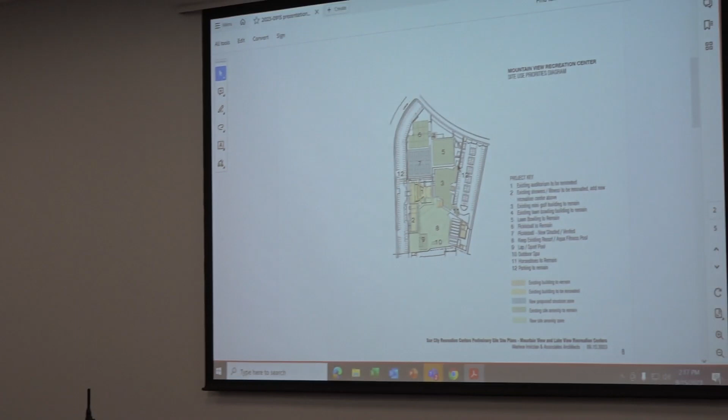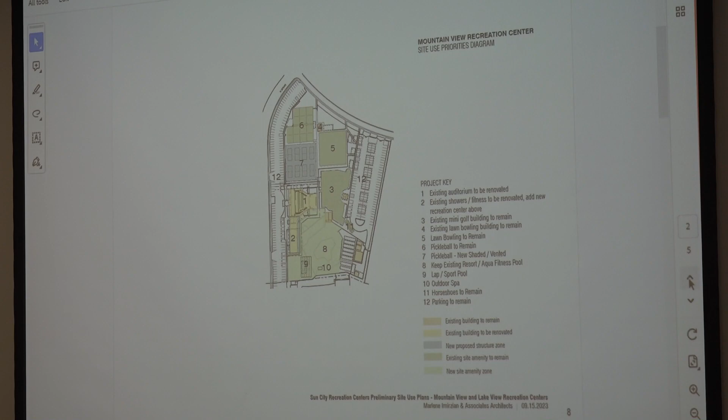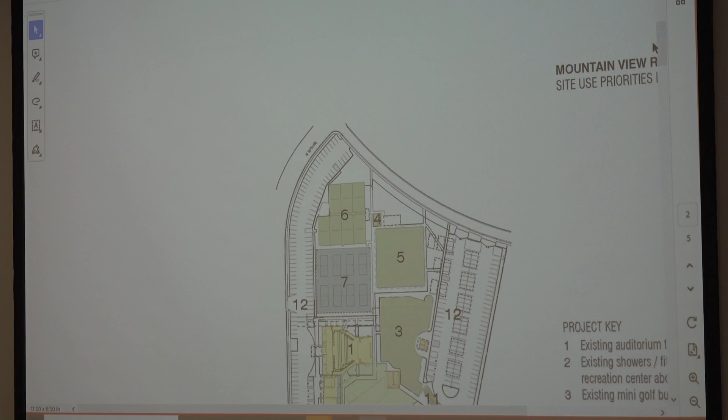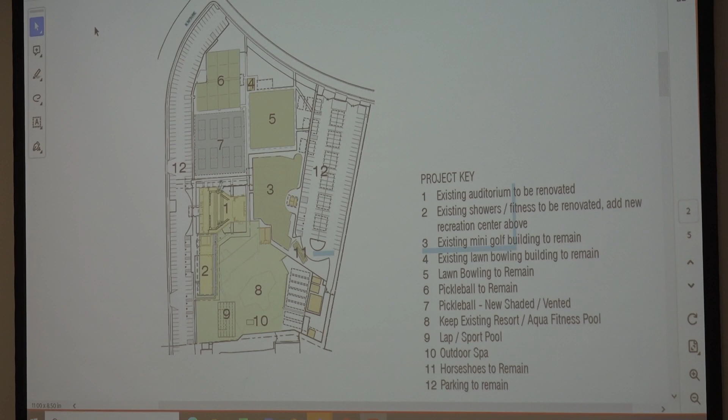Let's see if I can turn this back on. Is there any way you can enlarge that? Yes. Right there, yeah. Use the sidebar to move—that's not it. Oh, she's just trying to turn it on. Who's doing that then? Who's controlling it? Okay, thank you. Kevin's doing it. You want to point for me too? Okay, good. All right, now let's see if I can get this thing on. Front button. There. Okay, there you go.

Okay, so these are the items that we wanted to retain. I'm going to start with the simplest: the pool, as it is, can be retained, everybody, and we can still add a lap pool and a spa. So for right now, what we're showing is that beautiful pool can remain. This is a lap pool, and the reason it's in that direction is because when you're swimming laps, you don't want to go east-west, so ideally you want to go north-south. That's the only reason it's oriented that way, folks.

And then here's the exterior spa. Again, remember, this is not final—this is a fit test. This is just a study of your site, to show how the actual items you want to do can fit diagrammatically on your property.

The pickleball area here is one more than minimum—this is 8 new courts, designed to allow for a minimum of shaded cover that is located so it can in the future be enclosed. What that means is the structure is separated enough so it won't have to be made smaller in order to be a building. You guys don't have to care about that, but the key thing is when you build buildings, you have to have separation, and that's what's been done.

Okay, so I'm just wondering, these drawings—how preliminary are we talking? Are they still subject to change, or is this it? There is no final design of anything on this project. We've been on this project for less than almost a month, so there's no building design, there's no survey. This is a very expedited site evaluation study to help you understand sizes and fit. That was the purpose.

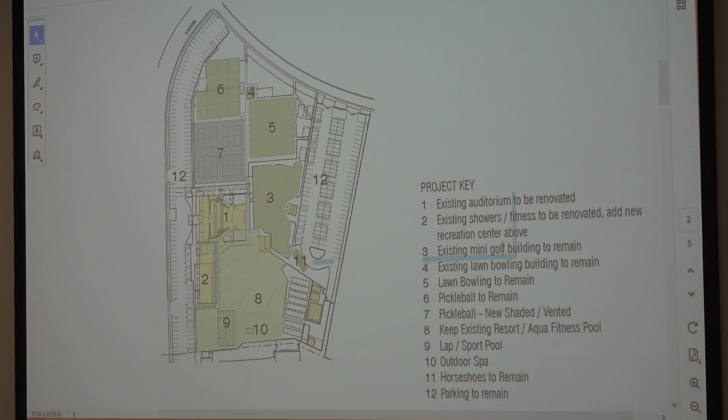Do you have a placement drawing of what it would look like if we put a new building up, a new performing arts center on this site? No. Does that 2,600 get split up on each side? It is. So it's not all on two sides. Correct, yes.

So I have a question about the total amount of roofed space. If 2, 1, and 7 mean a 2-story building, 1 a single-story building, and 7 an enclosed building, it looks like that comes to about 70,000 square feet of roofed space, and quick calculations mean 350 parking spaces. I know the Marinette Pavilion with 8 pickleball courts is 30,000 square feet, so I'm guessing that's 30,000 and the others are 15, 15, and 15 since you've got an upstairs and downstairs. Just curious about the total number of square feet of roofed space we'd be looking at.

No, I looked at the square footage and we only needed 202. The pickleball area is just over 19,000 square feet, and the new performing arts area would be about 22,000. And what's currently existing?

Currently the performing arts and... I mean parking. Oh, parking, you have 206, or more than that, actually. I'd have to look back for the exact number. I think it's 236, though. 254. Thank you.

So right now this is not a change in use, and the existing uses will remain. The requirements for pickleball in terms of parking are not the same as those required for performing arts.

Okay, do you want to quickly show the next slide? This is a little bit closer so you can see a little bit of the scale, folks. Pretty nice in terms of how we can get the seating in, actually, in terms of the overall. And this shows the trade-offs and what we have to do to get the various levels in there. Don't look at this detail, it's just a quick test because, Stacia, I wanted to make sure that when we talk about the number of seats, it allows for the required ramping, access, and wheelchair locations, okay? That's it. Next.

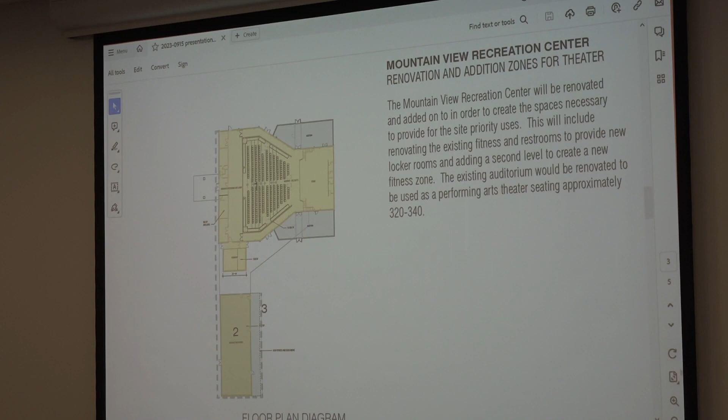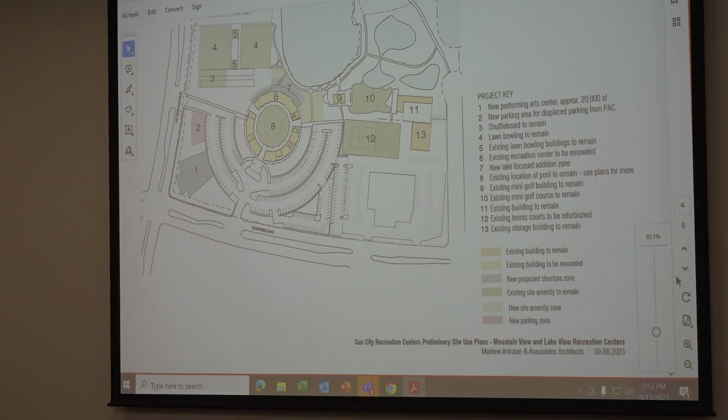And then Lakeview, we're gonna not talk about anything at Lakeview except the potential location of the Performing Arts Center, which is right here. Here's a couple reasons why we're showing it in that location. Number one, obviously, it's in a public corner. We can make a modification with the existing parking with a drop-off lane that could be quite nice for the front entry. And then we can expand parking if needed next to it. This can be a different shape also.

And then it would still allow for this primary viewpoint and this building to remain there as kind of the main connection to the water. And then any additions and modifications we want to do to that building—right now I'm not going to go into that, because all we're looking at here is a potential location for the performing arts.

What's important is that the actual location of this, except for putting it over this building, will not affect right now the potential cost of it. So even if you want to look at alternate locations, that's always a good part of the design phase. Once we get through all the details of what specifically you want in that building, it may be that we recommend it goes in a different place.

That is not critical right now, in my opinion, from what I've heard about Lakeview. What's critical is: is there enough potential on Lakeview to put a new performing arts building there? The answer is yes. So that's the key—whether it's exactly here or somewhere else, as long as it's not over this building. And we can determine a way that I'd recommend we not have to redo the zoning for the commercial, but that's always a possibility if we have to.

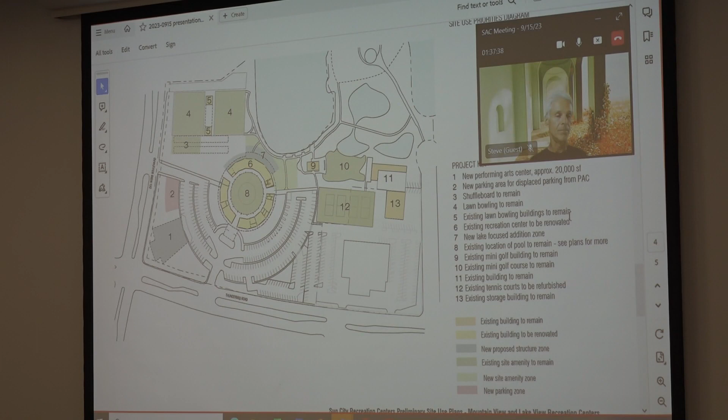Yeah, so again, we'll take a look at that point, if this becomes a real project, to optimize the location of it. I think the three key things I'd like to share are that this type of auditorium appears it can fit on Lake View without major demolition. There are other areas it could go, where you could move some things around if you had to—we could look at alternative locations, but the key thing is that it could fit. And the very important thing is that the parking could fit.

That is huge, because one of the key things we wanted to make sure is that putting this in this location would not require a new parking structure—that's another added cost that's very significant.

Hey Steve, don't you have your hand up?

Do you have a layout of what number one would look like, like you provided for Mountain View? No, inside, okay—similar, just that it fits. Seems like this. But no, what I mean is in terms of rehearsal space, is there adequate... Let me just say this.

This is a very, very important building. This is not something to guess at. This needs to be designed. We need to get into the detailed discussion of specifically what you want, and I really don't think it's appropriate right now for us to go to the point where we think we can do the building layout. We've gone very far on the other one just to show a fit test—really, that's all it is. It's a fit test of the existing.

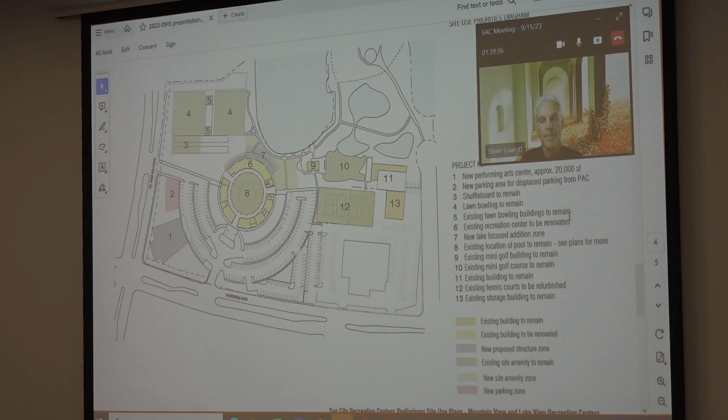Yes, sorry—at this location, is that building big enough for 400 seats? And also, is there going to be access to that stage? 400 seats would be tough in this location. We'd have to test that and see about the orientation.

Okay, so right now, the implication that it has to look exactly like this is not correct. There's lots of things we can do to the site to fit the building in and relocate parking, etc.—different locations, different orientations. I'm not talking about parking, I'm talking about access to that stage for trucks. Understood—yeah, so service access. We'll have to study that.

But keep in mind, 400 seats—well, we're saying 300 minimum, this is 320, so we're way over. Well, no, we're not. Did you forget what I showed you last week?

But 300 is not near enough for any of the clubs. So right now, this committee established 300 as a baseline—that's all it is. Those are different things than theater. That would be like me telling how big to make the pickleball court.

I'm outnumbered, is what I'm saying. Except for here, and here. But 400 is the minimum.

Mine was a general question along those same lines. What we're looking at in that gray area, is that similar in size to what we'd be looking at at Mountain View? No, it's bigger. It's bigger. Okay, that's important to know. It's huge.